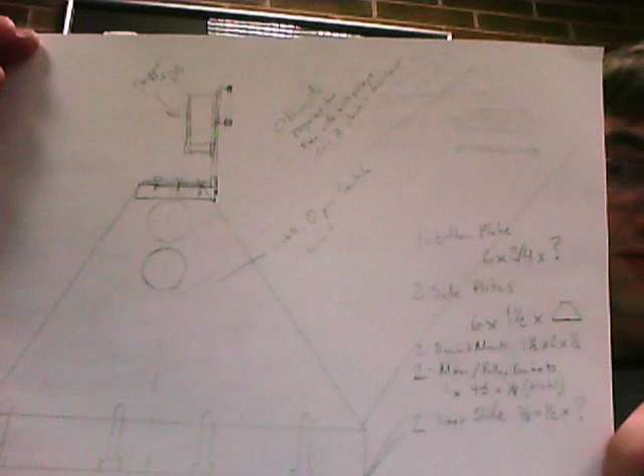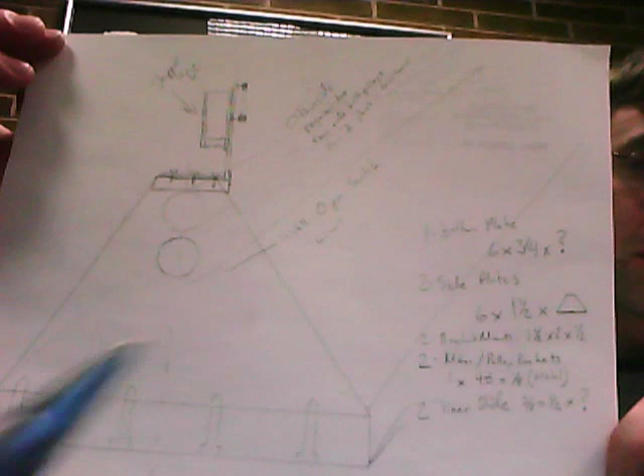All right, we're looking at the model from the side, and we can see here the side plate, the base plate. We have two linear slides here and here. They're slightly large — this is actually drawn to scale, this is about how big I want to build this. I do believe the base is 6 inches in this direction, 3/4 inches tall, and then the length of it along this plane is determined by the length of the slide bearings that we end up going with.

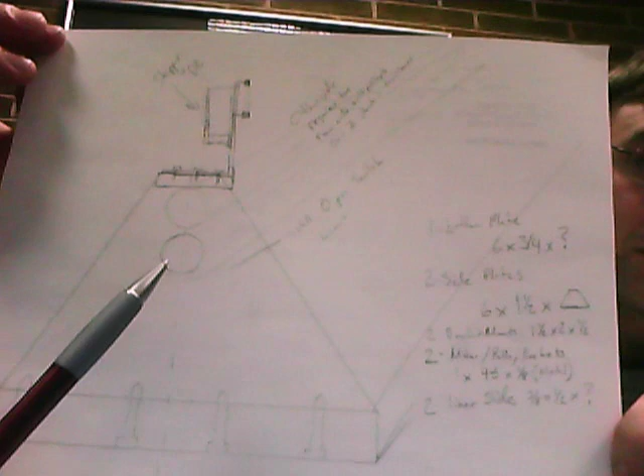These are a little large, they're kind of in there for conceptual drawing. I'm trying to find 3/8 to 1/2 inch for those. There'll be two of them, 1 and 2 right here, and then there'll be a small block here — my computer's lagging on me, how delightful — to hold the stepper motor that's located up here-ish, kind of over there.

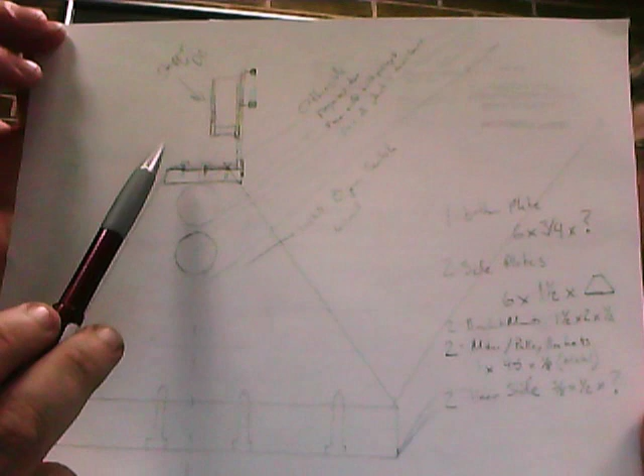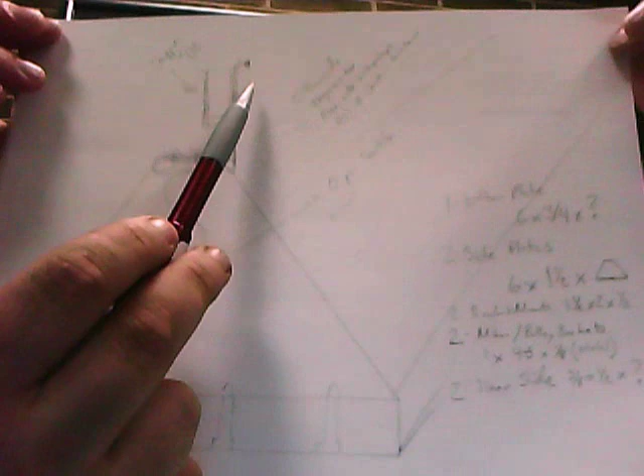Yeah, freezing computer is horrible. The stepper motor can be replaced by a DC motor, but it's all depending on what we find and what we have available. On a slight other note, the belt will go off the tip of the motor here, and then above that will be a pulley so that belt can be out of the way.

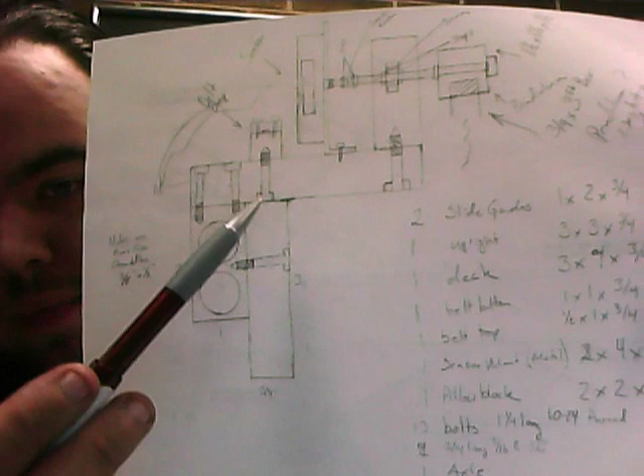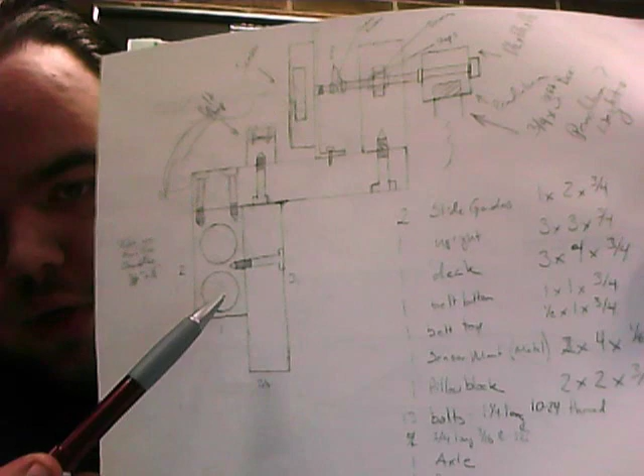Right about there will work. So those linear slides we were talking about earlier will go through this block here. There will actually be two of these blocks, one behind the other. We're looking at it from the side again. We have our vertical plate here and our deck plate that goes through here. The screws are kind of drawn in about where I want them. I want 3 in here, but obviously I don't have a very good solution for drawing circles with me right now, so that is the way that is.

We have our belt stop block right here. We have our rotary sensor here. The mounting bracket for that goes through here. There's an axle that goes through here. To connect the axle to the sensor, we'll use a little rubber sleeve that's located here.

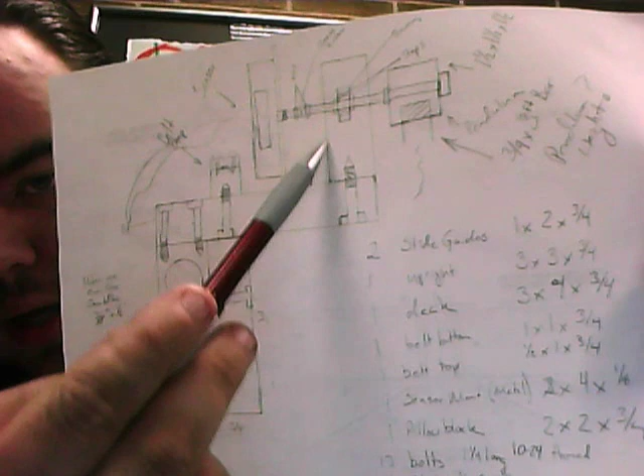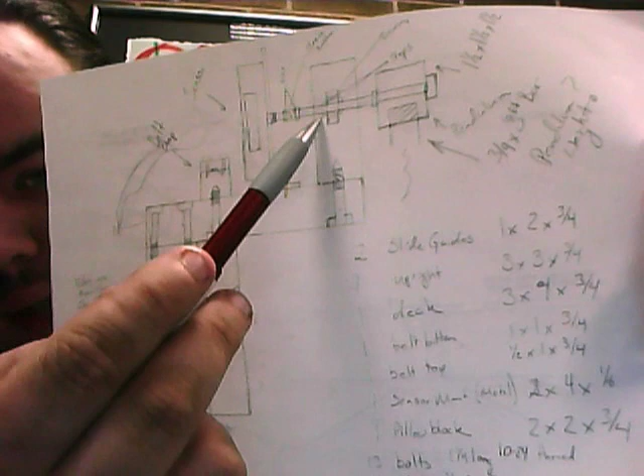The pillow block is right here and right in there. Inside the center of that pillow block will be just a regular skate bearing. The axle will be sized to the bearing since I have those bearings—I have a bunch of them. There will be a couple little stops on either side of the bearing to keep that centered.

Over here will be the mounting block for the pendulum. My goal is to make two different types of pendulums, one a solid bar and the other a double axle pendulum. I don't have that drawn up just yet, but it's pretty simple. There's a pair of legs, and in between the legs will be the second half of the pendulum, and that will be pretty simple to build. It won't actually be that complicated.

At this point, I'm quite confident that my sketchwork can be transferred over to a DXF solution, and a proper list of parts and prints of parts will be available soon. At that point, it's just a matter of securing the materials and the sensors and the bits, as it were, for the project, and to start assembly.

Once the frame is assembled, we can start to test with code and see if we can't get the carriage to snap back and forth fast enough to do a self-erecting process.

A couple little things of note: I'm going to put two limit switches on either side of the base plate so that the carriage can't run off the slides. So if somebody was to try to push the pendulum and keep pushing it, obviously the cart will try to get underneath it, and if they push too far, the cart will be at the end of the track.

At that point, what I think the solution is going to be: we'll program a fail and let the pendulum fall to zero point, hanging down, and then once it resets to the center of the stage, go ahead and go through its erecting process so that it can get back up in the air, and that way people can play with it again.